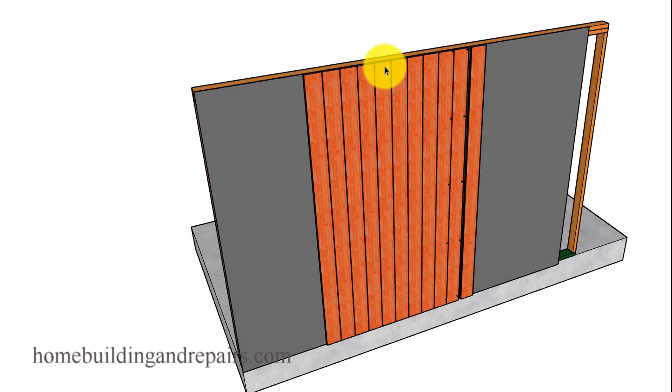In this video, I will be providing you with a few ideas on how you can replace tongue and groove siding, and this is going to be vertical up and down siding. The methods could be similar for replacing it when it is going horizontal or from right to left.

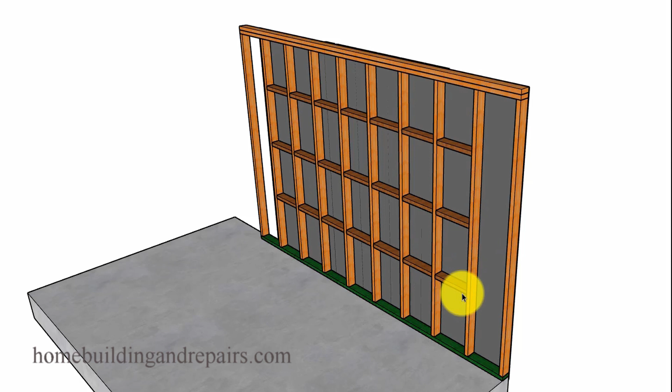Now, if you do have vertical siding, then you are going to have blocks, and they're usually going to be 24 inches on center. So on an 8-foot wall, you would probably have 3 rows of blocks like we have here, and that is so you can nail the siding into something when you're in the middle of a stud bay.

Not too difficult, 1 or 2 nails. In tongue and groove, sometimes you can blind nail this stuff too. Put a nail in over here and make it look like there aren't any nails at all in the siding. So again, giving you an idea here.

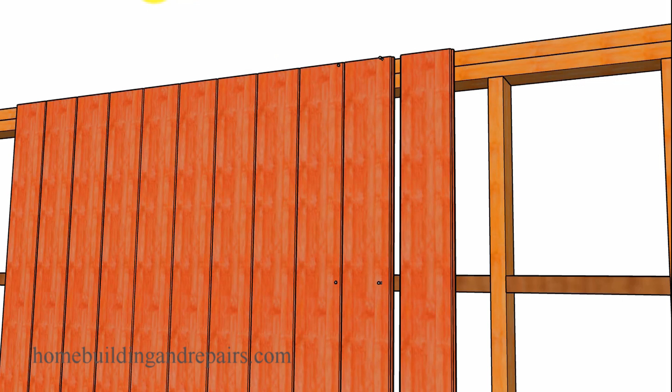Without the paper, let's go ahead and put the building paper on. Building paper is usually going to be in between the wall framing and the siding. To install it, you're simply going to slide it into the groove here, and that of course is going to help hold everything in place.

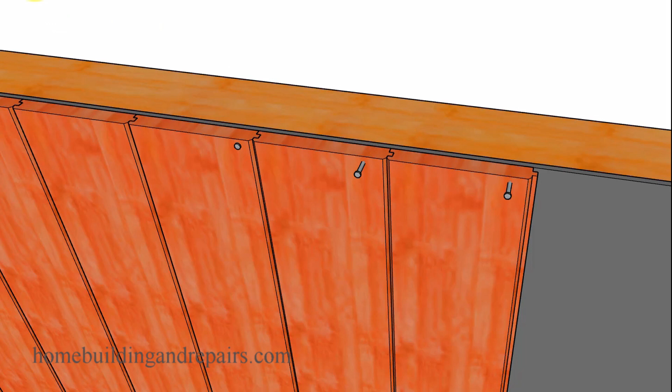Now let's go ahead and take a board that is damaged here. Just going to put a little bit of damage in the middle. Then we are going to cut a line down the entire length of the siding.

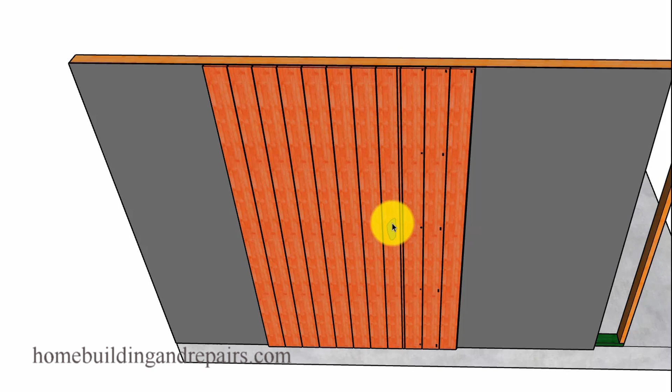Now you don't need to do this. I cut it down because of my little patch here. I wanted you to be able to see the line. I would recommend just cutting it down the middle, and you might even want to cut a couple of lines.

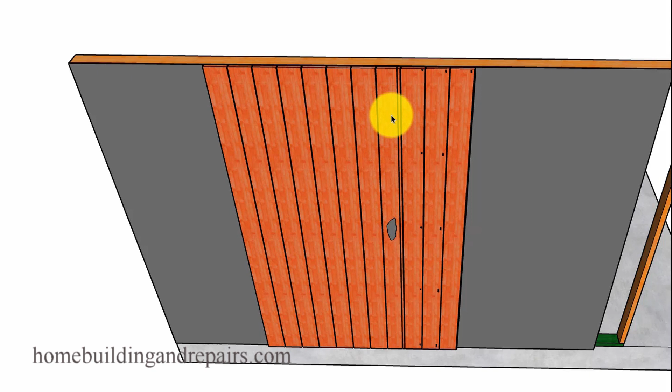It's going to be difficult to get your saw up into the roof area underneath the roof eaves, but you might be able to cut a line, and then maybe even cut another line, and then cut a section out, and then get some type of a saw to where you can cut from here to there, and just do it in sections. That might actually be the best way to do something like this.

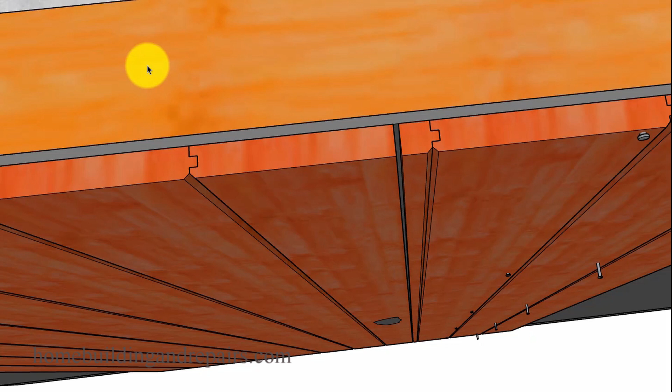But once we have a saw cut down the center or down the siding, we'll be able to remove the pieces with a pry bar. And of course, it's going to depend upon how it is nailed and what nails or screws might need to be removed before you can actually remove either one of the sides.

Next up, we will pry the larger board out. And again, this might be difficult. If the board isn't coming out easily, then maybe the saw cut wasn't deep enough here, or there might be a few more nails or something holding it, attaching it to the framing that you might have to find.

In order to do that, you might actually have to get a pry bar in there, pry it out to find out where some of the nails are, depending upon how the board is finished. If they use some type of putty to cover everything so you can't see the nails, then you're going to have to pry. And I don't recommend using a lot of force.

If you have a board that's not going to come out, stop, and then just cut smaller sections out. And of course, if you cut a smaller section out, you're probably going to be able to see where the nails are. If they nailed it in the middle, at the edge, or you might be able to find something that is hidden that you didn't see before.

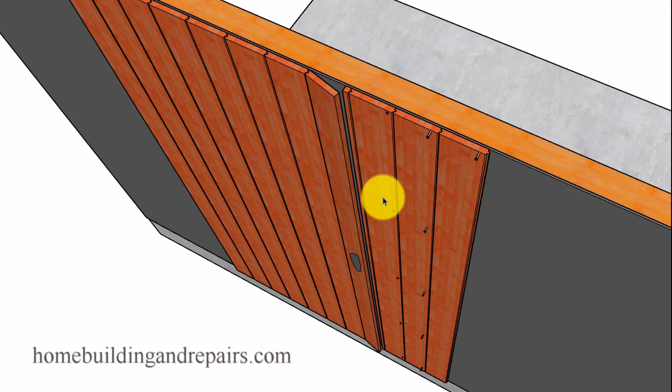But just to grab this thing and jerk on it and pull it out, I don't really recommend that. Just be careful taking it out and try not to damage the boards on either side. And after that board is out, we can go ahead and remove the next piece.

And now we have an empty slot, and the next problem you're going to face will be to find a board that is the exact same size. It is not going to be uncommon to find a board that's going to be a little bit larger or a little bit smaller for this type of repair.

In our example, I found a board that was the exact same size, and we won't have any problem getting it in, except for this notch right here. This section is going to have to be removed. We'll be able to slide it in most of the time and push it up tight in here, but we won't be able to get the groove behind the tongue on this board. So we can slide this into here, we just won't be able to get this in here.

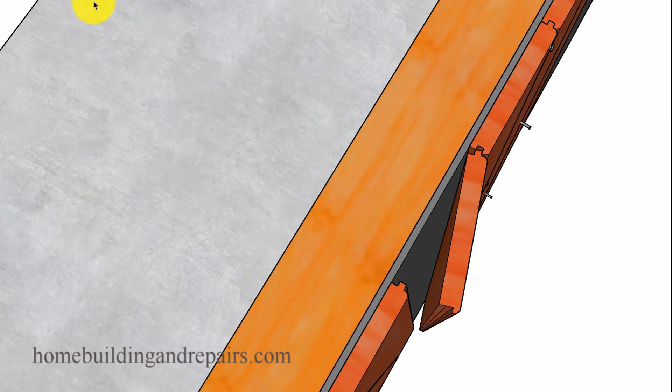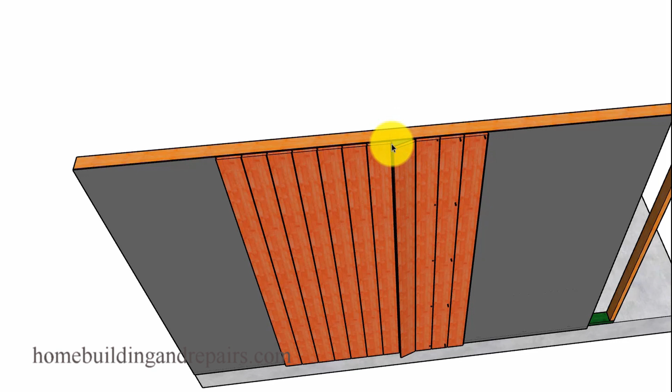And I'm not saying it's impossible. You might have to slide it in from the top or the bottom, but for this method here, we will need to remove this edge. Again, you're not going to be able to go behind the tongue, at least unless you have a method that I don't know about—please share it with us. But for those of you who have done this type of repair before, this is probably going to be the best way. Again, you could always cut the tongue off of the other side, that's not a big deal, and then leave the groove. You can pick one, you just won't be able to have both. Hopefully that makes sense.

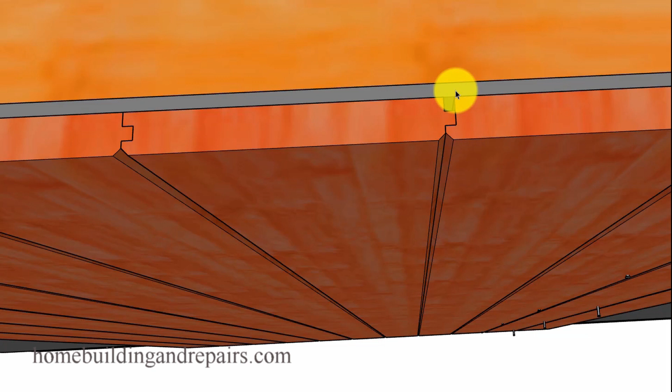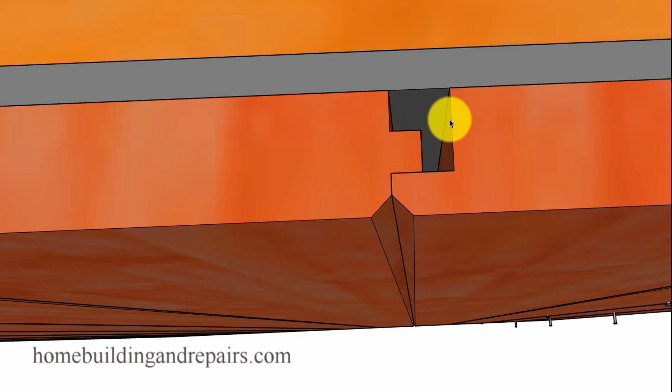We have made our repair and slid the board under here, and we can now nail this to the other side. Now this would be difficult to blind nail, but I'm not suggesting you can't go into the little groove here and put some finish nails in there to make it work. So again, this part will need to be cut, and in some cases you might need to cut it a little wider. If the board is a little longer, you might need to cut it back a little further. A little gap here isn't going to be a big deal—I don't recommend more than 1/8 of an inch, but a gap here to make the board fit a little easier isn't going to be a big deal.

But if it is a little longer, you might be able to reshape this side to make it fit. You might be able to use a router, or even run a saw at a 45-degree angle down the side of it, or take your time, grab a planer, and shave some of this stuff off.

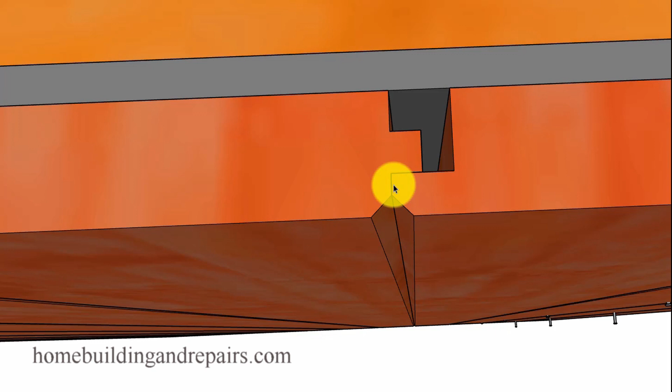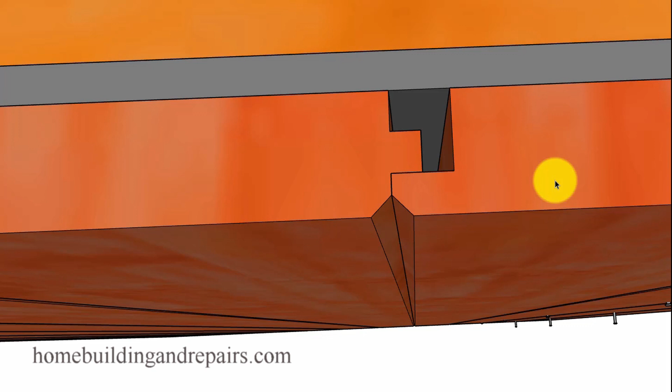And if there's a little gap here—let's say the board's a little too small and you've got a gap—you could always fill that with caulking if you wanted it to blend in a little easier, depending on how small the gap is. If you have a board that's 1/4 of an inch shorter, this is going to be a noticeable gap from the outside, and you might have to just make your own board or your own siding in that case. Grab a piece of lumber that's a little larger and shape the sides to make it work out.

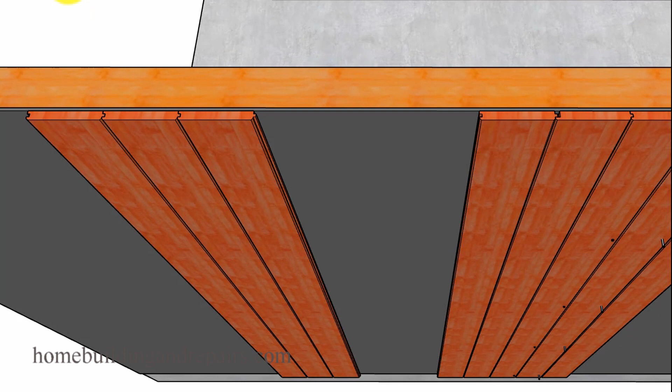Now the next method, depending on the damage—if you have 2 boards that are damaged, or if you just want to use this method—would be to remove 2 or 3 of them and then try to put it back together like this. This might require a couple of people to help you, but if you can somehow get everything to line up, you might just be able to push it in and everything goes into place.

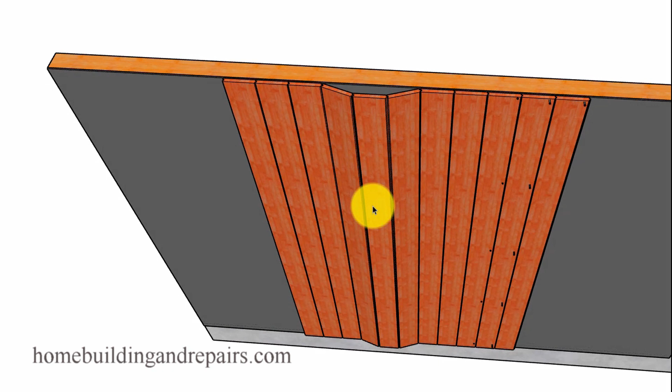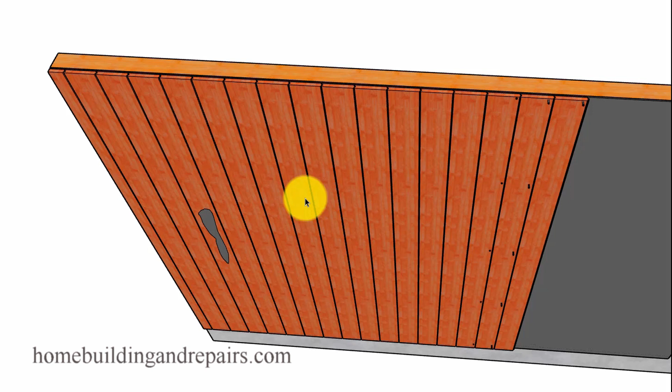Now, if you push something like this in and it's tight, and you're using dry lumber, don't be surprised if this wood buckles in the wintertime when it has a chance to absorb some moisture. I'm just throwing that out there—when I say something, don't be surprised, I'm just pointing something out. It might not ever happen.

If it does, hey, at least you're not going to be surprised. Now, what am I suggesting? To use wet lumber? No, because the wet lumber, or lumber with a little more moisture in it, you might put it on and it's tight, and then it'll shrink, and then you'll have gaps between everything.

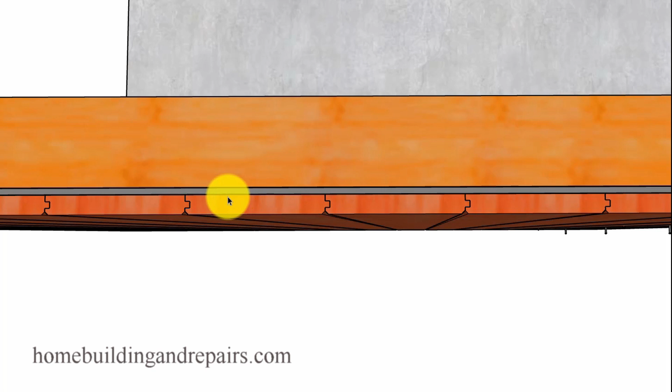So this right here is not the easiest repair to make. And if you're making this, you're a contractor and you're doing this for someone else, point this stuff out to them. Don't just come out and say, hey, yeah, I can fix that, and you're never going to have a problem with it. I have seen quite a few problems from these type of repairs.

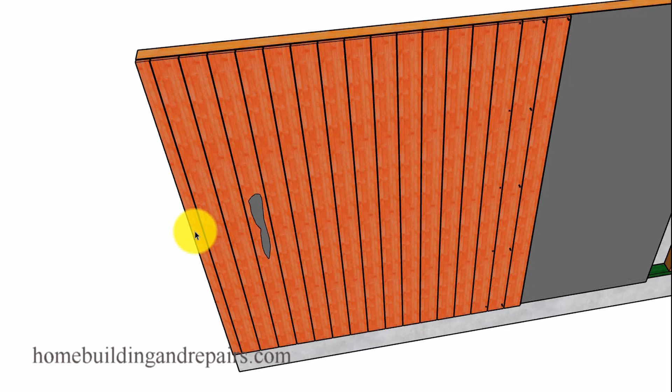Now, let's go to our next repair, and that would be if you had some damage that might be 3 or 4 boards away from a corner. If this is the case, then remove these boards and replace all 4 of them. That way if some of the wood expands, it might push towards this side. And of course, this right here is going to be a little easier repair. You're going to be able to pull each board off and then replace it.

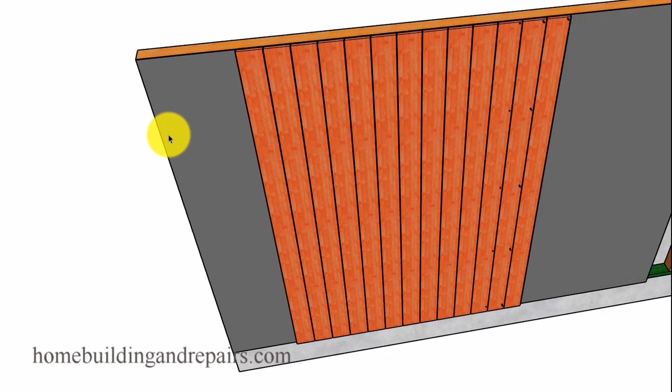And, you know, can you pull the boards off? If I had damage 6 boards in, let's say, and 5 of the boards are good, you can be careful and pull the boards off and then reuse them. And if you are going to reuse them, reuse the ones that you have. Put them in first and then put the new board in on the outside.

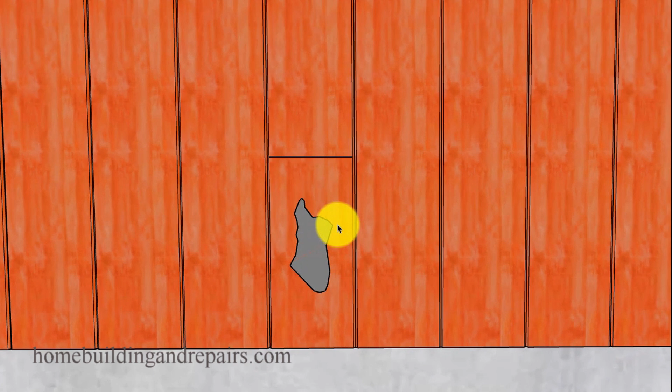Now let's take a look at another method. And of course, if you have some damage in different areas, you can actually just cut a section of that damage out and replace the board also.

Keep in mind that doing this type of repair, you might damage the building paper. If you do that, you're going to have to fix it somehow. And if you need more help on that, leave a comment in the comment area. I don't think I do have a video on that yet, but I am going to do another video on this. This video was inspired by someone else's question who wanted to know how to replace the damage with the tongue and groove with a pipe sticking out of it. And of course, I'll put a link in the comment area when that video is made.

So let's go ahead and take a look at the damage again. It's up here. Get a saw, cut through it, be as careful as you can. And again, if I'm going to replace this, I can take and cut it into sections, and I can be careful. If this is 3/4 of an inch thick, I might be able to take a 5/8 blade and cut through and then get a chisel and pull some of this stuff out. If you can pull it out without damaging the paper, then you're going to be in a good spot.

Now, I do got to point this out too. If you do replace something like this, you might need to find out where the blocks are and then cut at the block line, because otherwise you're not going to have any backing behind here to fasten the new piece of wood in, unless you're planning on tearing out some of the building paper, putting a block in, and then replacing it. So find the block lines, the ones I was talking about that are 2 foot on center, and then cut in the center of the block at the top and the center of the block below, and then you'll have something to nail or screw the new piece into when you do make the repair.

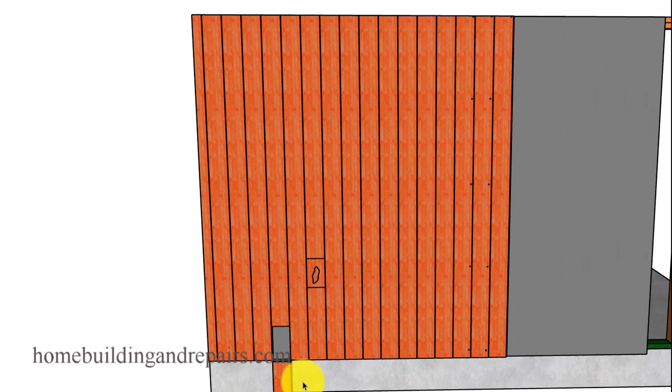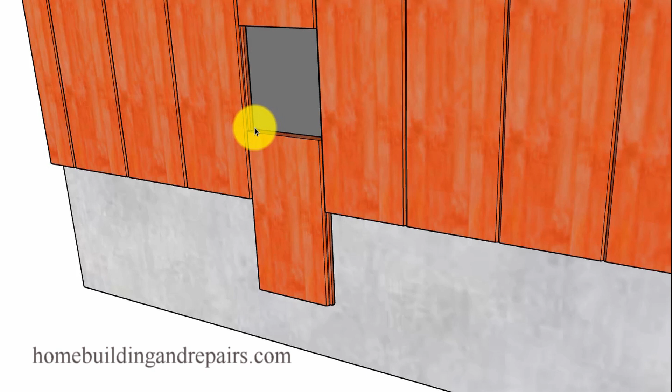And of course, as I mentioned earlier, if you are on the bottom or somehow on the top where you have the room, you might be able to slide a new piece of siding up from the bottom, just following the grooves. You won't have to cut the back of the tongue out, or the back of the shaped lumber, I should say. Won't have to cut that out.

You can simply slide it in and then nail it at the bottom or the top. And with this, you won't have to worry about cutting it where the 2 foot block is, because the tongue and groove on each side will hold it in place.

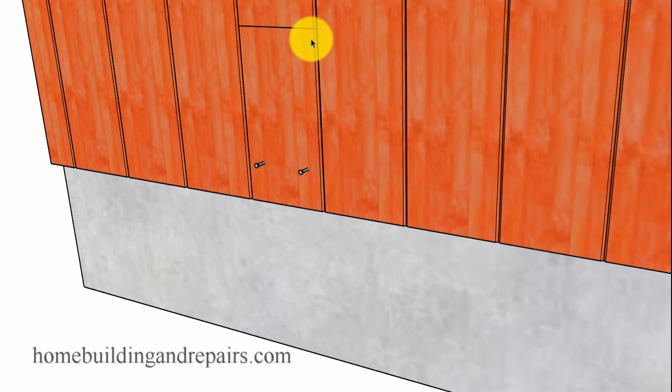Now let's go ahead and take a look at another method. Let's just pretend like we have a lot of damage on the bottom of the siding that needs to be repaired. If that's the case, just simply cut a line down the bottom of it, get rid of it wherever the damage is.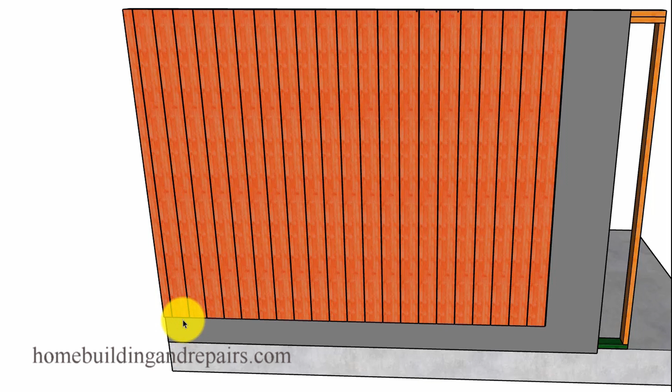If you have some damage on the bottom and only have 1 or 2 pieces that might be fixed with some type of filler, then you won't have to go very far. But I've seen these before where the bottom is damaged at least up 3 inches, wood rot and stuff like that. If that's the case, simply figure out what you're going to use, a 2x6, 2x8, or a 2x10, and then cut off the desired amount so that the board will fit into place. Not too difficult of a repair.

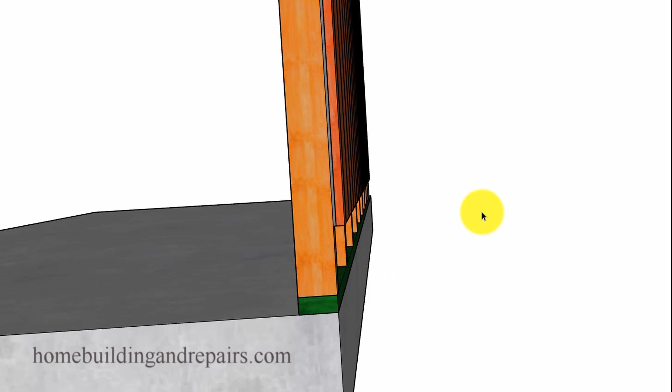The only problem with this is you're probably going to end up cutting the paper again. And if you do, don't worry about it. Cut the paper and have the desired length that you need.

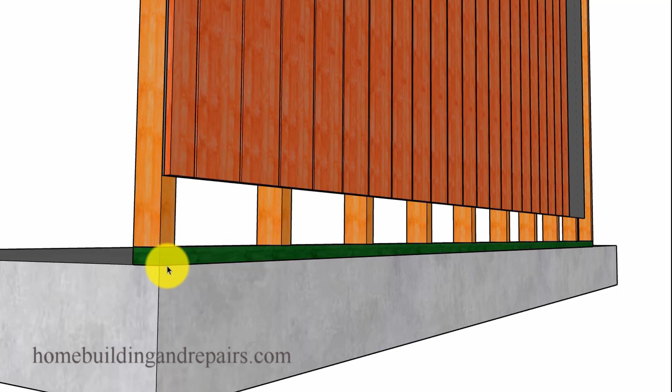So if you're going to have a 2x10 and it's 9.5 inches wide, it would be nice to have a 1 inch overhang off of where the top of the foundation is. So have it stick down at least 1 inch, and this would come up 8.5 inches. You would snap a line and then cut that where you needed it.

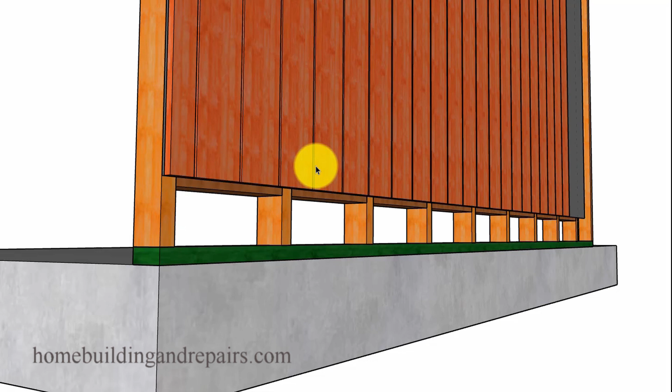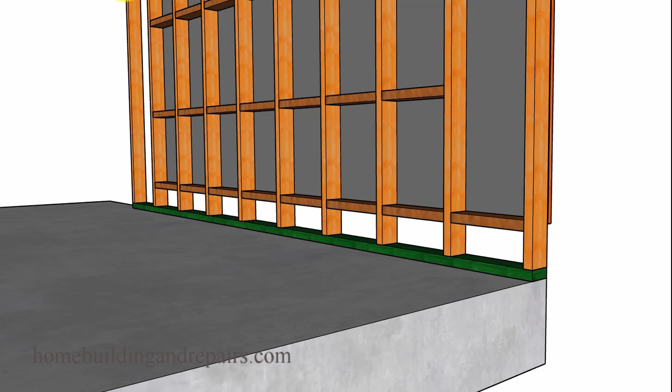Now this one might require some type of blocking to nail the siding into, otherwise you could have a problem there. And of course the siding here, I'm going to go ahead and pull the siding out a little bit so that you can get an idea what I'm doing.

So I have my building paper here. I need to get a piece of metal, Z-bar, something like this, behind it, so that any water that comes down on the front might come back a little bit, but it's going to roll out. Any water that gets behind the siding is going to roll down the front of the paper and out. I do not want to put the Z-bar behind the siding.

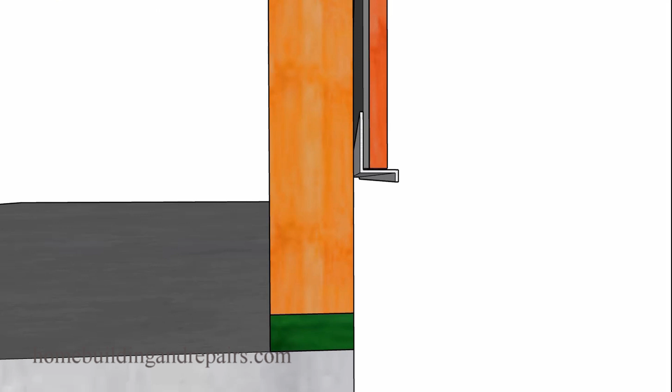That's not going to benefit me as well. I'm not saying you can't do it. I would just rather see it behind the paper if you can get it. But if you can't, then just make sure that the other layer of building paper is going behind that.

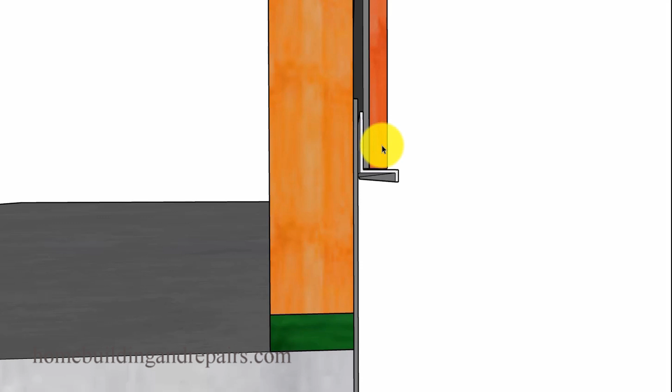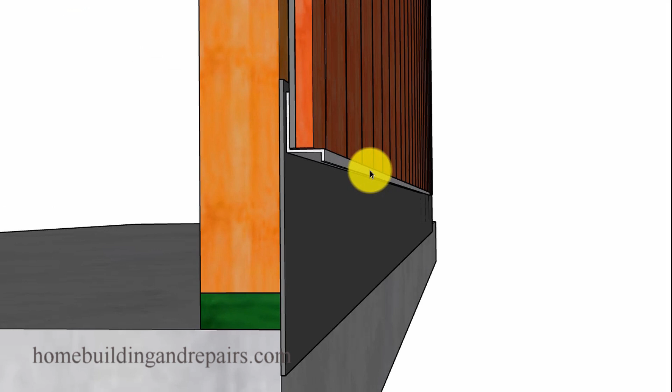So here you can see where if I had the metal installed on the front of the paper but behind the siding, then the building paper lapped over each other, I'm probably not going to have a problem. So either way would probably be fine. But again, I like to do it to where I have the building paper over the metal, and then it gives me another kind of reassurance, some extra insurance to have the water drain away a little safer.

And then of course you can put your bottom board in here, and then no one's going to know any different. They're going to think, hey, that's how the house was built. Let's just take it apart here to give you an idea of what we were doing.

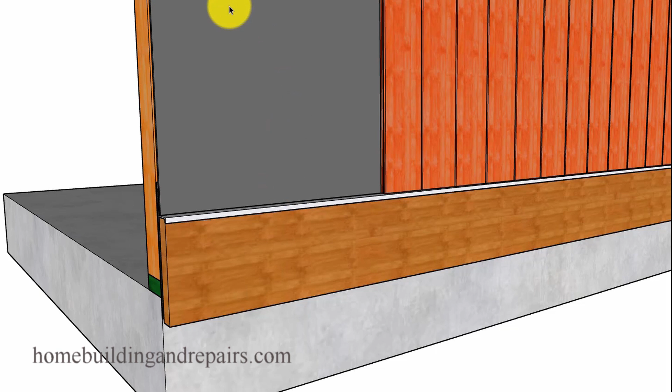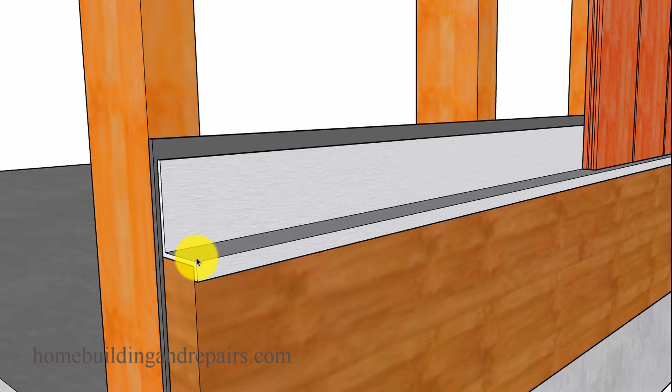I know this works well, makes my videos longer, but some of you don't know what this metal looks like. It kind of looks something like this. It makes a Z shape, usually referred to as a Z bar.

The building paper underneath, this might require you to pry some of this stuff forward a little bit to get this paper underneath. Installing the paper might be the hardest part of your project. And of course you might need to remove the paper, the lower section of it, so that you can install your blocks.

Here's how you can install your blocks, unless you want to remove the drywall from the inside. And again, I'll leave that up to you.

The size of the blocks might be determined by what you're doing. A 2x4 is going to be a little harder to install, so get a 2x10 or a 2x12, something bigger that you'll be able to nail down a little easier. I've had blocks before where I couldn't nail them to the studs, so I simply used screws and screwed the siding to the blocks and just let them float in there. That seemed to work out just fine.

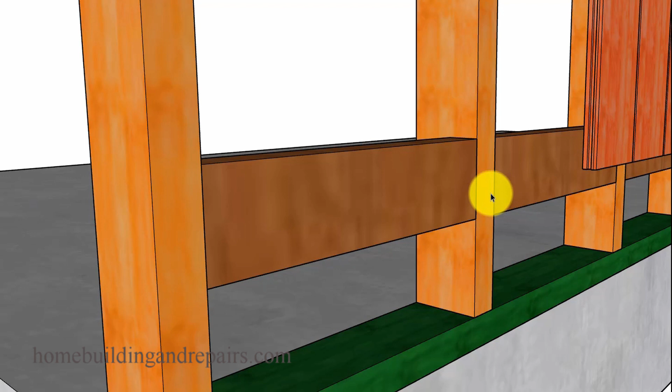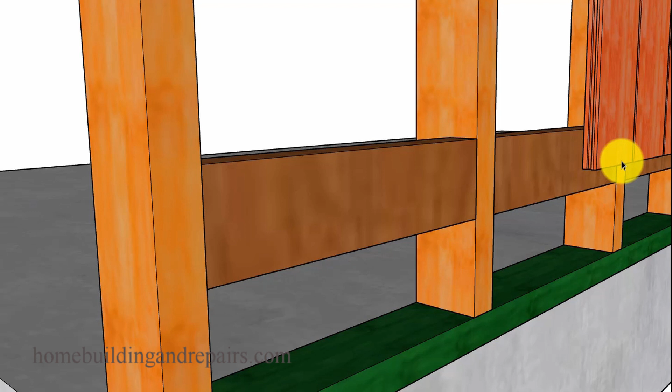By screwing the blocks to the siding, and eventually screwing one of them to the studs every 16 inches, it really seemed to create a sturdy lower section there. I've never had any callbacks on that where I had to come back and fix it. Though maybe people moved, and two years later your stuff wasn't working and you never got a call back. So I'm not always saying some stuff is going to be the best, but sometimes nailing the blocks in here is going to be difficult to do. If that's the case, you might need to figure out something else that's going to work for you.

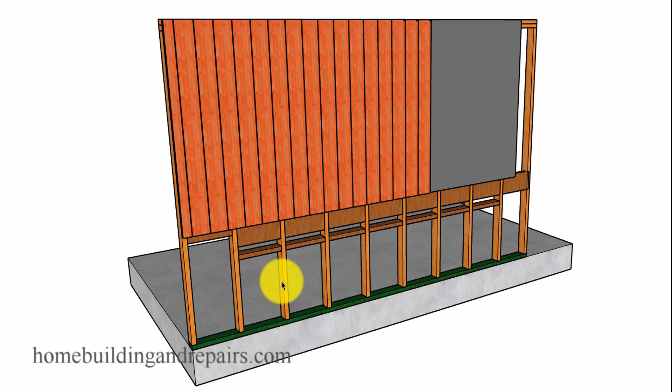For my last repair suggestion, if you have damage on the bottom that's a little too much, you need to cut it a little higher. It's going to be kind of the same idea as the previous example, except you might need to use wider blocks for this one, and you'll understand why before we finish the video.

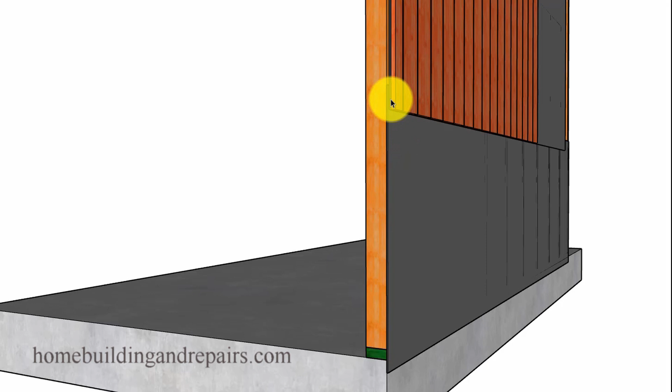The building paper again is going to have to slide underneath the other building paper so that the water flows over onto it. If this building paper was in front of the building paper here, any water that gets behind the siding is going to flow down the front of this building paper and then onto the wood framing. So this lower one laps underneath the upper.

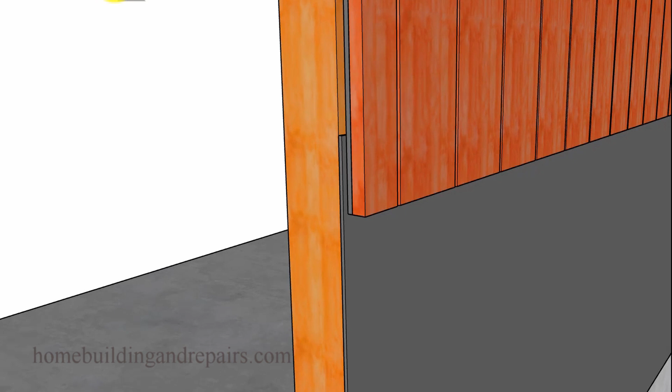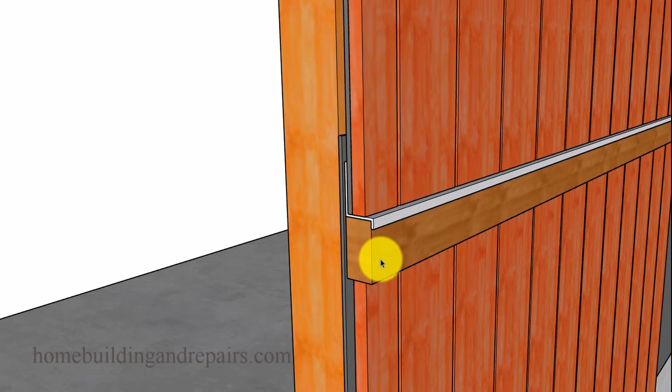Let me give you an idea of what it is right there. Same thing with the metal. A 2x4 might work here, or you might want to use a 2x6 - you can use whatever you want. A 2x2 might twist over time, so a 2x4 might be the smallest piece of lumber you're going to want to use.

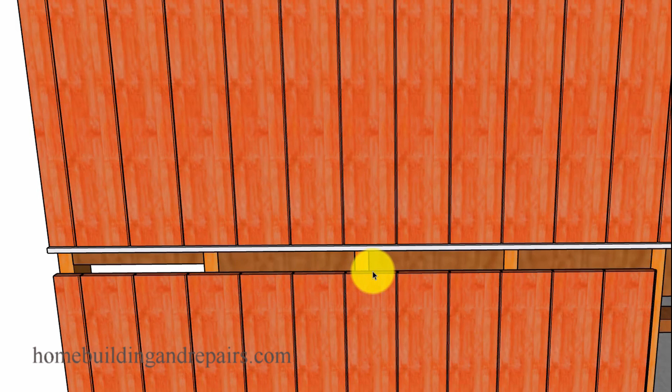Then reinstall the siding. And here's what I'm talking about with the blocks - we have larger blocks, so we're going to be able to nail the upper part of the lower siding here, nailing it into the blocking. If we use the 2x4, that's not going to happen. I know this looks like it's metal or open, but the one above has the metal, and this is just open here. So larger blocks are probably going to be the answer to that.

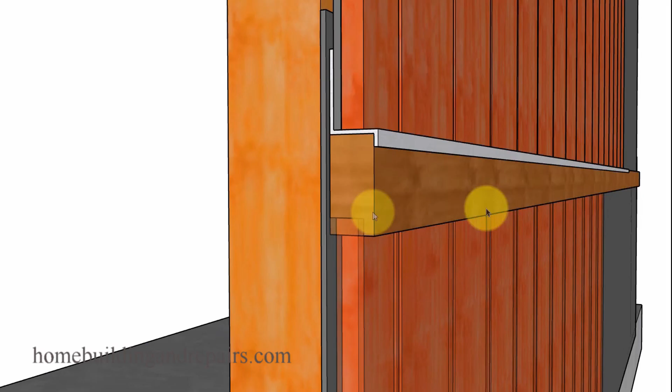For those of you looking for a little more insurance, cut a notch at the bottom so that all the water that runs down the face runs onto the edge and then down. If it's flat at the bottom, the water can actually go in between the gaps if there are any at the top of the siding. So that's another suggestion there - hopefully that makes sense.

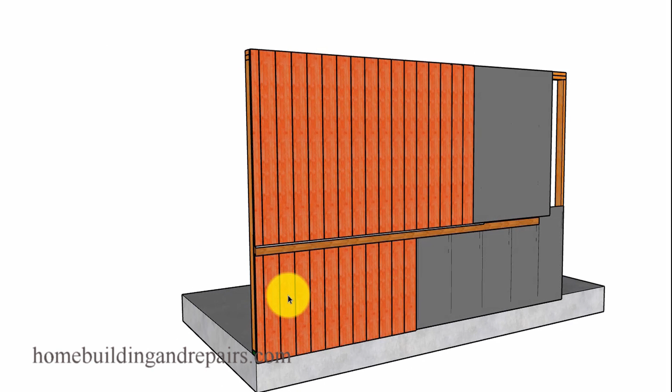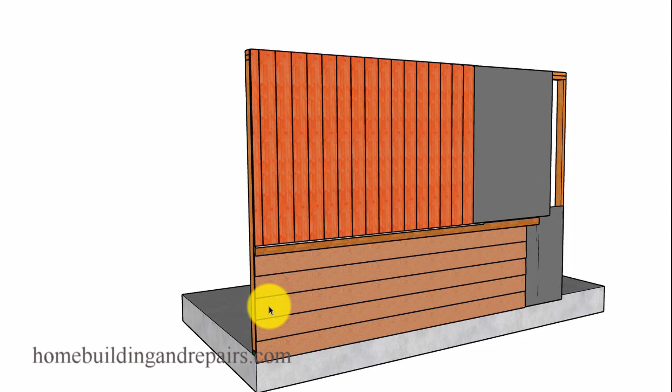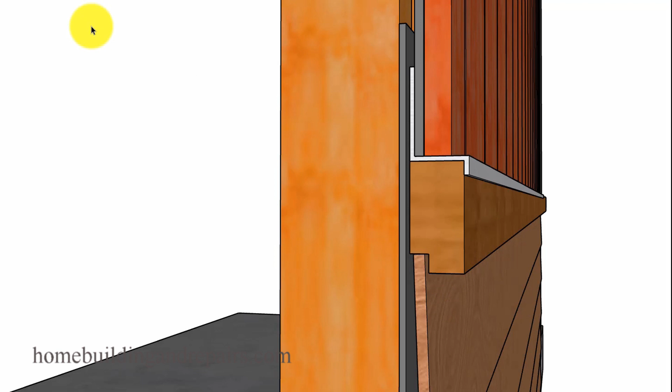This is how I would do it also. I like this idea, that's why I threw it in there. But that might not be enough - you might be looking to change the design of your building. If that's the case, you can install stucco, T111 plywood, or even lap siding at the bottom to add some type of architectural feature to it. And the notch might need to be changed or modified to fit the appropriate width of the new building materials. That brings us to the end of the video.